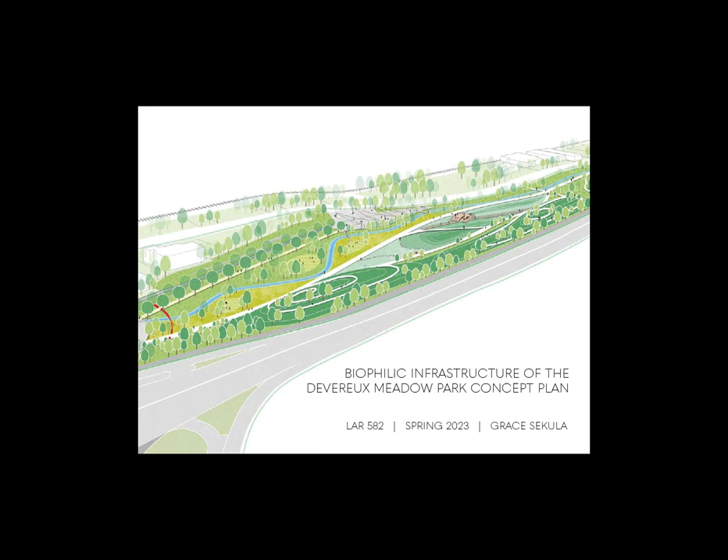My name is Grace Sekula, and today I will be going over the biophilic infrastructure of the Devereux Meadow Park Concept Plan. The Devereux Meadow Park Concept Plan is a proposal for a 14-acre public park in downtown Raleigh, near the intersection of Peace Street and Capital Boulevard.

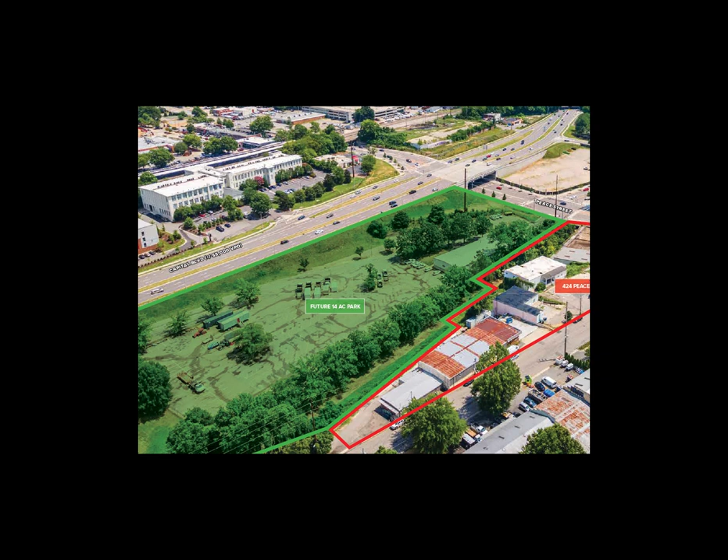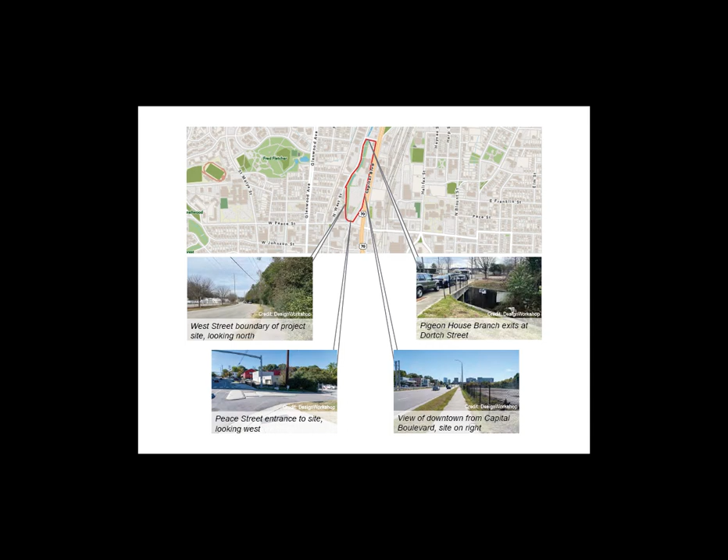The plan was developed by the city's Parks, Recreation, and Cultural Resources Department in collaboration with the Downtown Raleigh Alliance and other stakeholders. The park will be located near the new Raleigh Union Station and designed as a public domain space for gathering, recreation, education, and community engagement, with a focus on sustainability and accessibility.

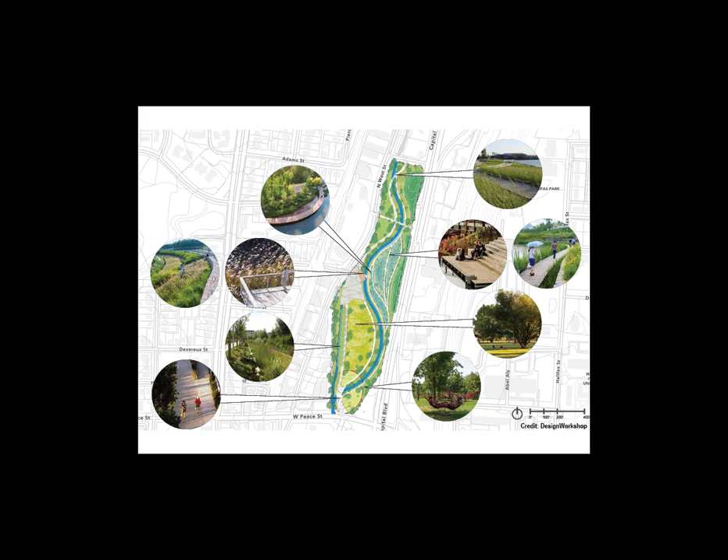The plan includes a range of strategies to address equity and inclusion, with the goal of creating a park that is accessible, welcoming, and inclusive for all members of the community. Local residents have been invited to provide feedback and input on the proposed design, and their feedback has been incorporated into the final plans for the park.

This approach supports the principle of biophilic design that emphasizes the importance of social connections and community engagement in creating healthy and sustainable environments. Three concepts were developed for the park design, and a public survey was used to determine which scheme to move forward with.

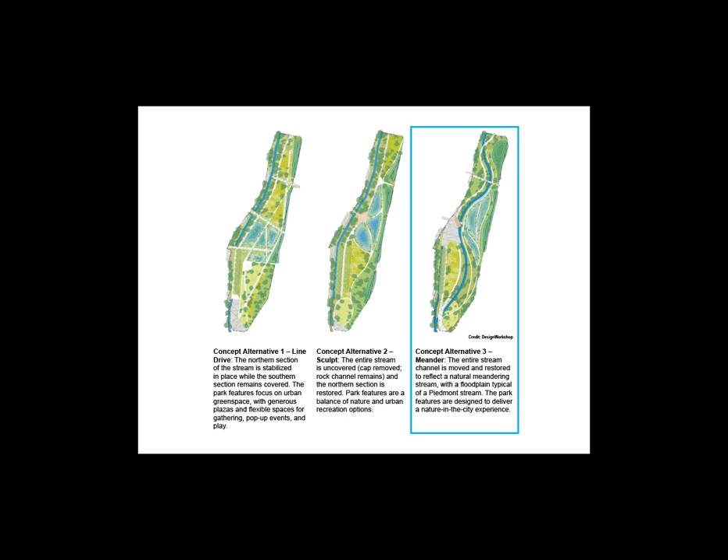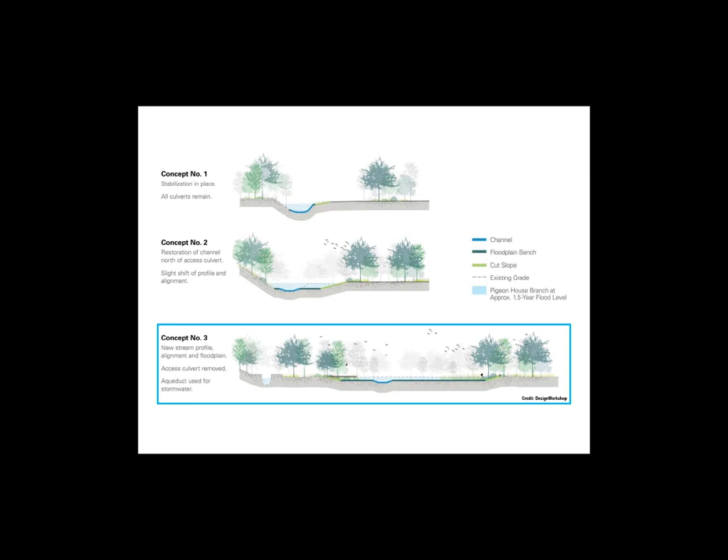The third scheme, called Meander, was found to be the preferred approach, through which the park would offer an urban nature experience by reconstructing Pigeon House Branch to imitate a natural meandering stream with a floodplain characteristic of a Piedmont stream. Some aspects of the other concept alternatives were also positively received and have been incorporated into the final design.

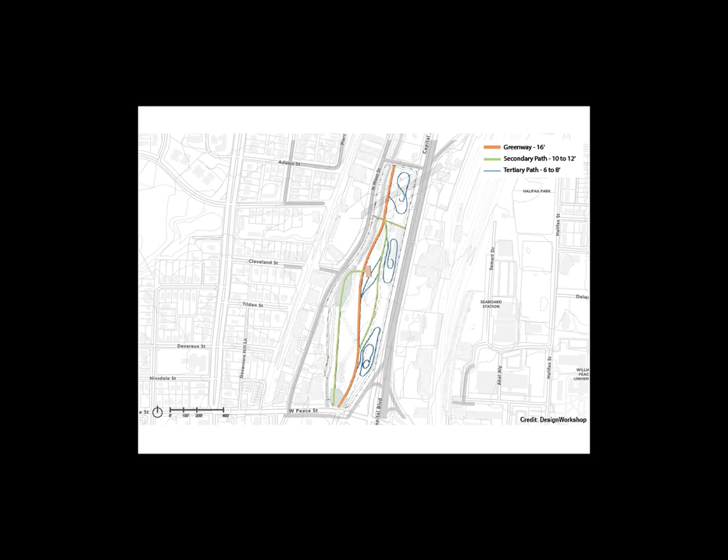One of the key features of the park is its accessibility. The park has been designed with a range of entry points and pathways that are accessible to people of all ages and abilities. The concept plan for the park incorporates a robust biophilic infrastructure.

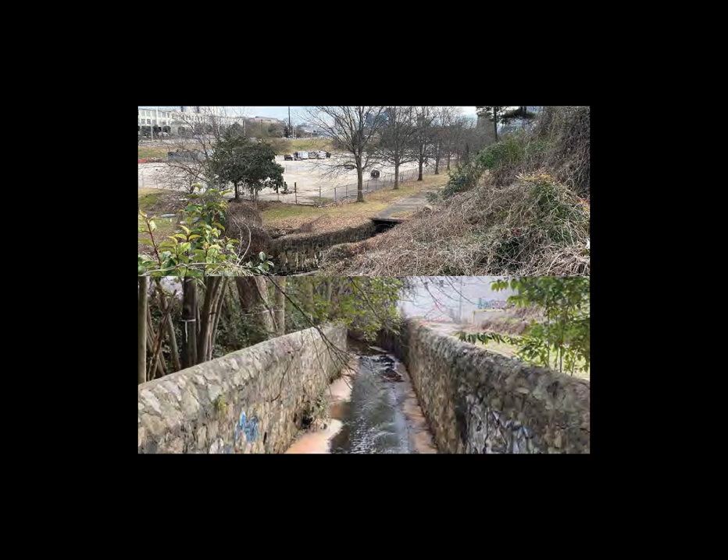The strategy for daylighting Pigeon House Branch involves removing the concrete channel and restoring the creek to a more natural state, including the creation of a wetland area. This will help to improve water quality, enhance the habitat for native species, and mitigate flooding.

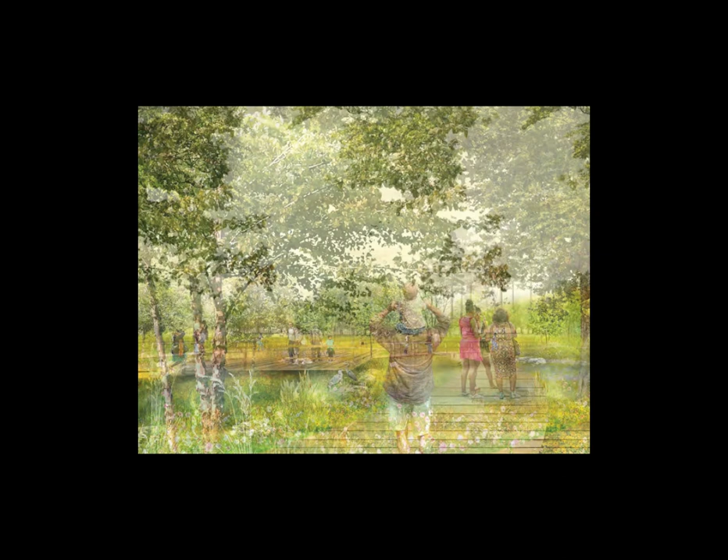A series of rain gardens throughout the park will capture and treat stormwater runoff, reducing erosion and improving water quality. Bioswales along the park's edges will capture and treat stormwater runoff from adjacent roads and parking areas, also reducing erosion and improving water quality. Permeable pavement will be used in the parking lot and other areas, allowing stormwater to infiltrate into the ground rather than running off into nearby streams.

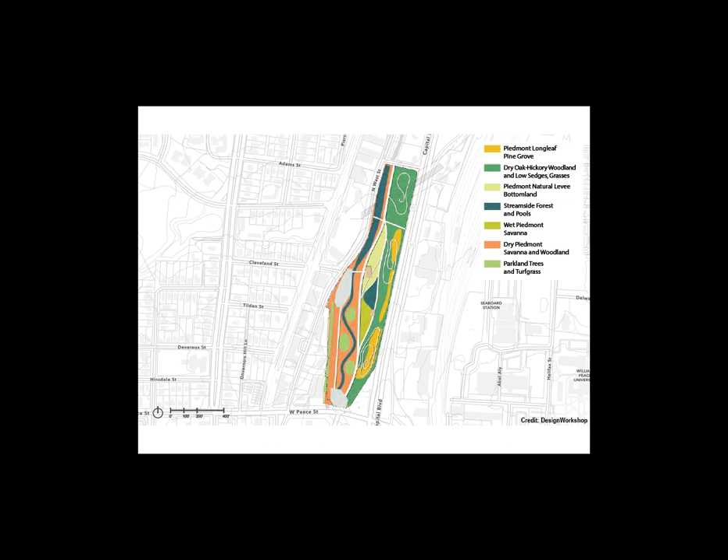The park design incorporates a range of native plantings which provide habitats for birds and other wildlife, improve ecological health, and help to improve biodiversity in the urban environment. The planting of a diverse urban forest throughout the park will provide shade, improve air quality, and support biodiversity.

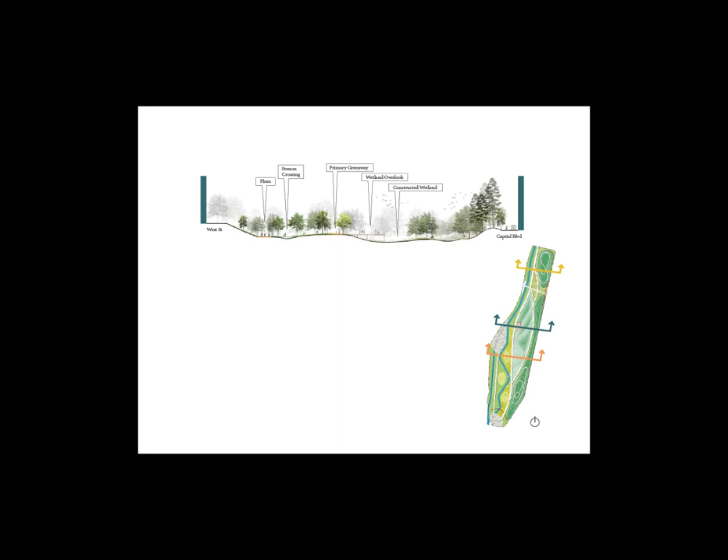The use of green roofs on the park's restroom and maintenance buildings will reduce the heat island effect, improve stormwater management, and provide a habitat for native species. A pollinator garden will provide a habitat for bees, butterflies, and other pollinators.

The park will include a community garden where residents can grow their own food and connect with other members of the community. A nature play area with trails and water features will provide opportunities for children to explore and connect with nature. Pathways in the park include a greenway, boardwalks, and winding trails.

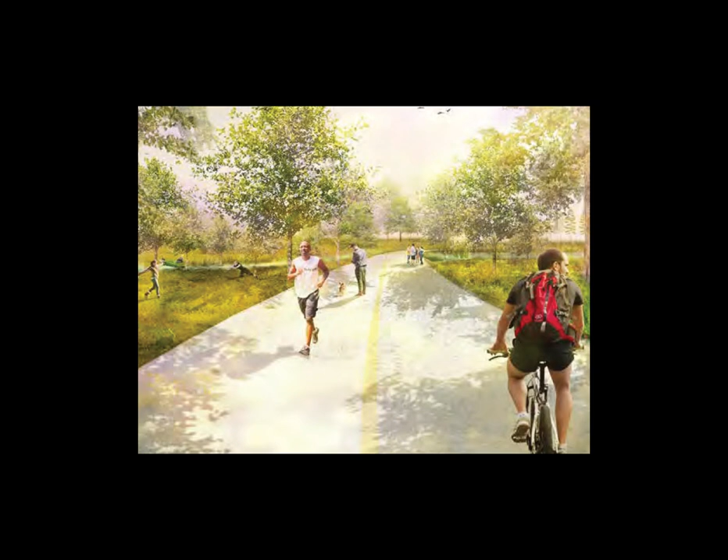Several areas have been designed for gatherings, including two entry plazas and scattered lawns and seating areas throughout for picnics, games, and other community events.

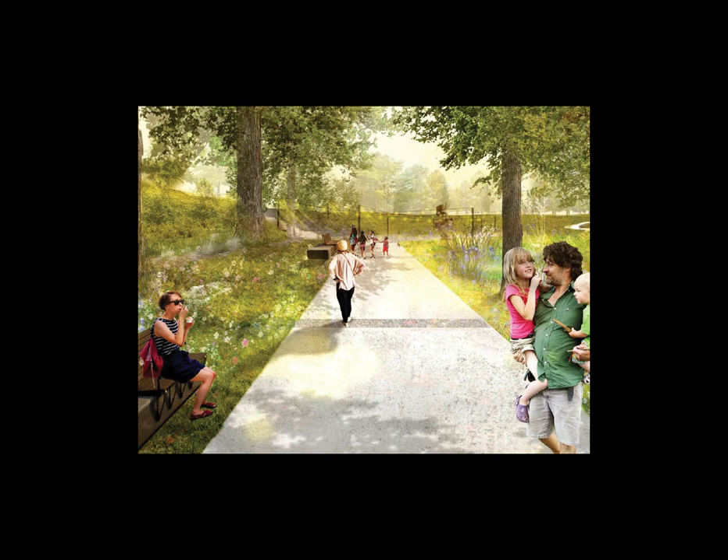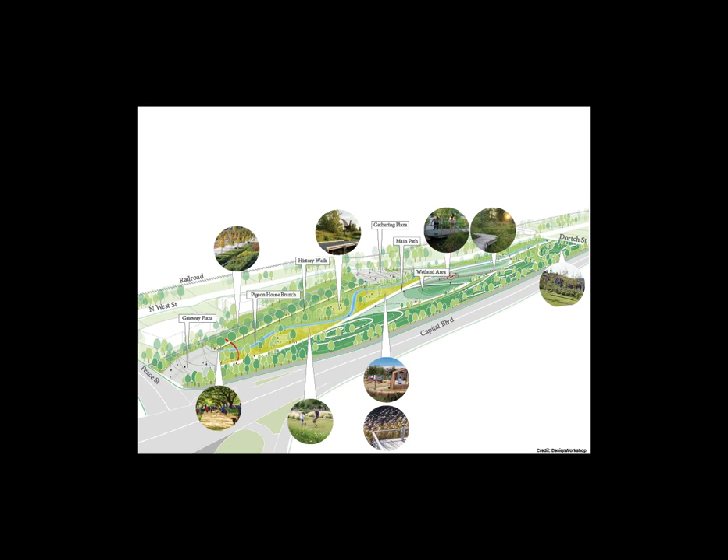In addition to these features, the park will also provide a range of cultural and educational opportunities for the community. This includes the park's amphitheater for concerts, performances, and other cultural events, as well as a multicultural art walk meadow to celebrate the cultural diversity of the surrounding community and to create a sense of belonging for all park visitors. And lastly, there will be educational programs focused on environmental stewardship and sustainability.

Overall, the Devereux Meadow Park Concept Plan is intended to create a vibrant new public space with a range of biophilic design strategies to support the health and well-being of the Raleigh community.